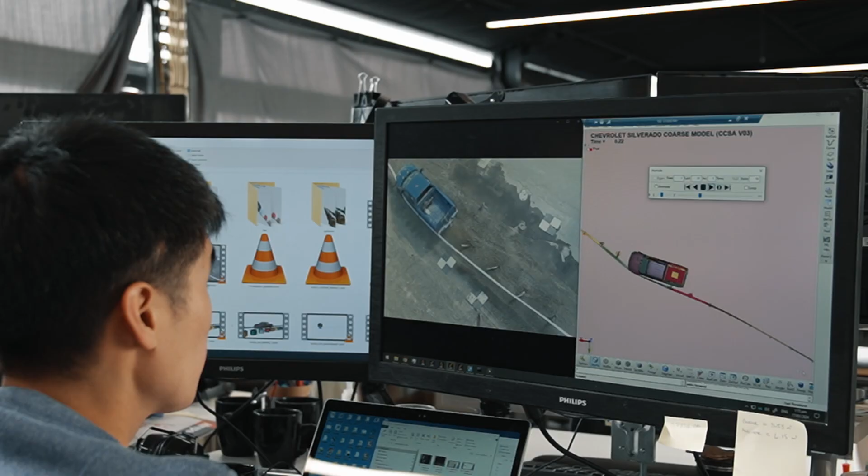At Holmes Solutions, we love solving complex design challenges. We specialise in engineering, testing and product development. Many of our projects are in high-risk industries with substantial life safety elements. Our work ranges from new transport solutions and efficient timber connections to adventure rides and dynamic impact testing. We do everything from ideation and testing to final product compliance. Our clients come to us because they know we want them to succeed. We help them make a meaningful difference in their businesses, their industries, and in people's lives.

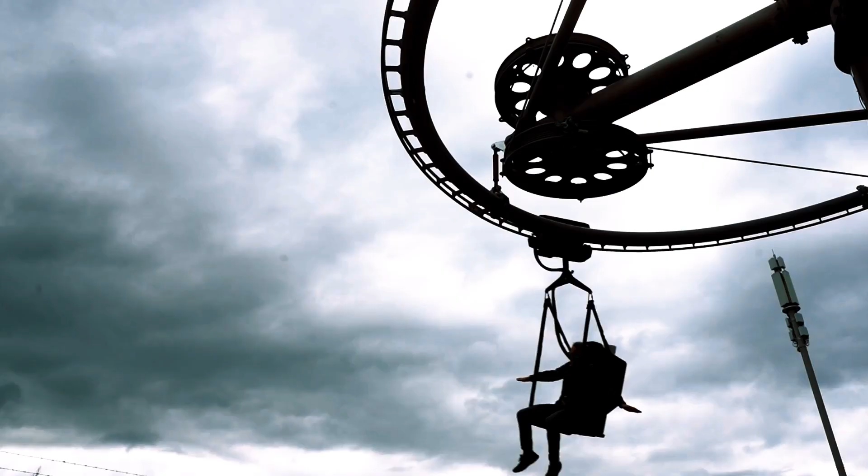We do a lot of exciting work in the adventure industry. One of the cool products we've developed is called Switchback. It's a new zipline technology that can go around corners and even uphill, opening new opportunities for epic adventures around the world. Our Switchback design work ranges from complex mechanisms in the trolley all the way up to site and course layouts. Collaboration is important at all stages of design.

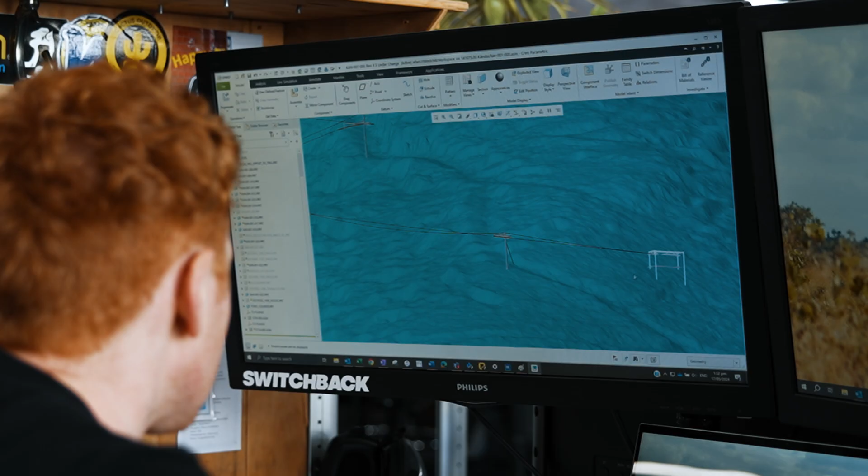We use 3D CAD modelling and PDM tools to learn and iterate our design ideas quickly. It's always exciting to show a client how their ride is going to look in real life, while exploring configuration options and final appearances on the fly.

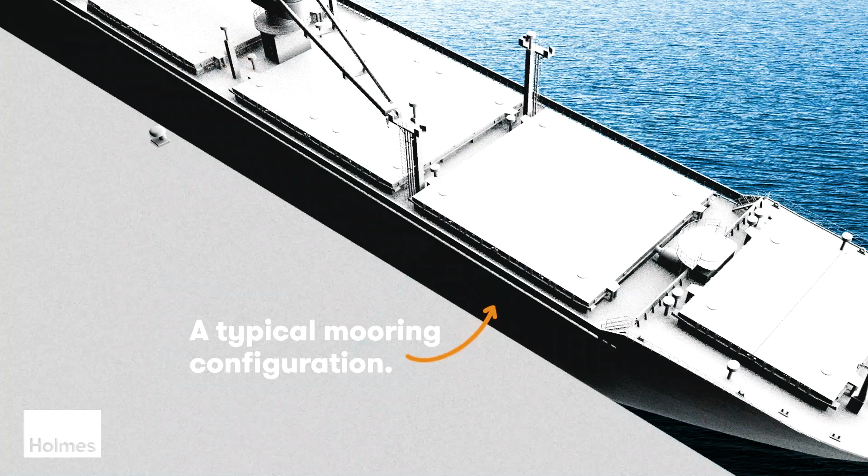One of the interesting projects we've worked on recently is testing to understand snapback events. A snapback is when a marine mooring line breaks under high tension. The parted lines can break the speed of sound in less than half a second. A snapback arresting structure is subjected to significant kinetic energy over a small area and over a short period of time, almost like a bullet.

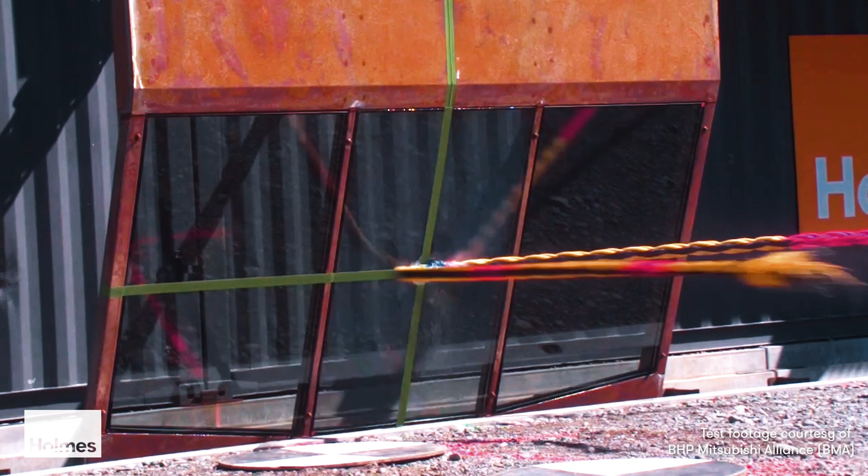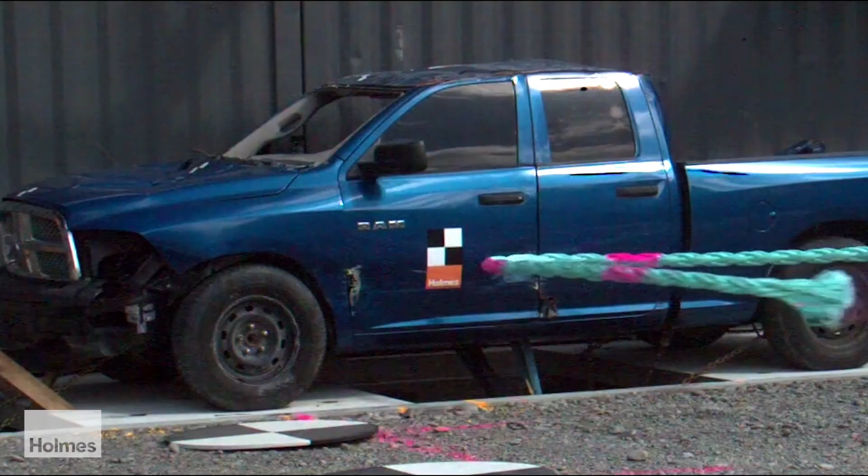Gauging impact severity with conventional methods risks understating the impact, which has led to people using safety structures which may not be effective. A major mining company asked us to come up with a validated safety solution for their berths. This had never been done before. We used a world-first full-scale test setup to prove their design.

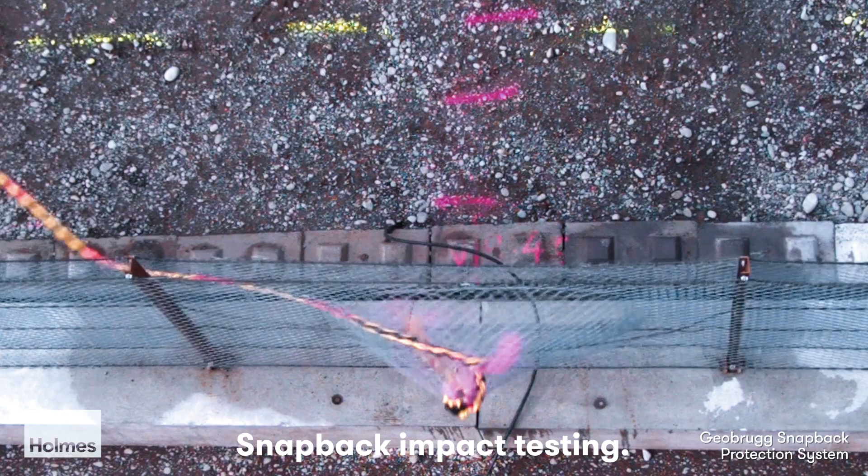Simulation was the key to this process, to understand both the line behaviour and the response of the arresting structure. Using the simulation model, we were able to break down what we observed in testing so we could develop consistency in the test platform and optimise the performance of the structure.

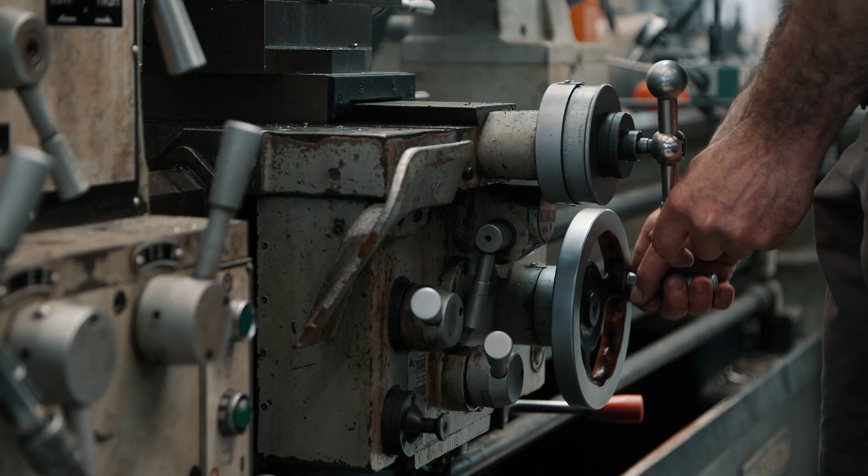Often, more complex problems require us to take our 3D models further into an analysis cycle with tools like ANSYS or Creo Simulate. The analysis tools complement our in-lab testing, allowing us to build powerful, validated models to try new ideas and vary parameters. The advantage of this is our ability to have the same team members working between the lab and the computer, using evidence-based design methods to solve problems in real time. Tools that can keep up with us and improve that process are invaluable.

Creo has been our primary 3D CAD modelling package for over 15 years. It helps us communicate complex ideas and collaborate on parts and assemblies within the team, especially when paired with Windchill product data management. These tools are vital to effectively design and problem solve for our clients.

We have a wide range of projects, so the tools we use have to be flexible and adaptable. ANSYS allows us to understand complex loading and stress responses in our designs, especially when a prototype or system is too large to build and test. This helps us narrow down our solutions early and focus on delivering the end result with confidence.

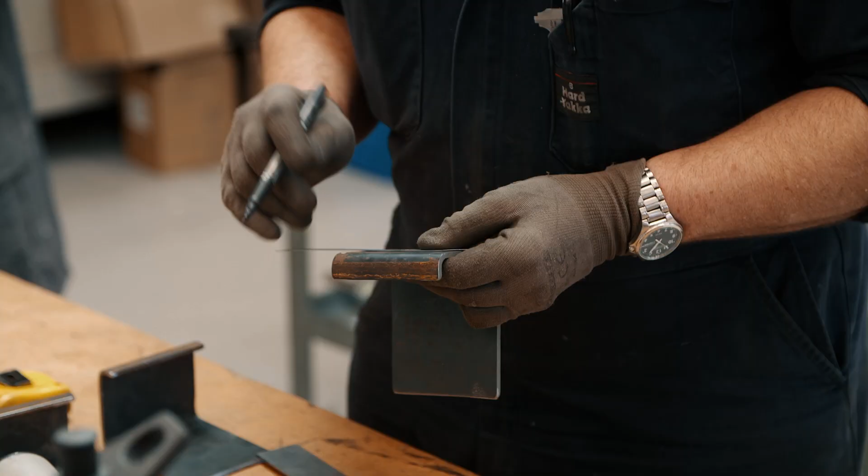For example, we recently significantly improved the performance of our client's product using topology optimization in ANSYS. This feature allowed us to determine where material should be positioned to achieve the highest strength to weight ratio. As a result, we achieved a 50% increase in the strength of the component, while keeping the mass the same as the original part.

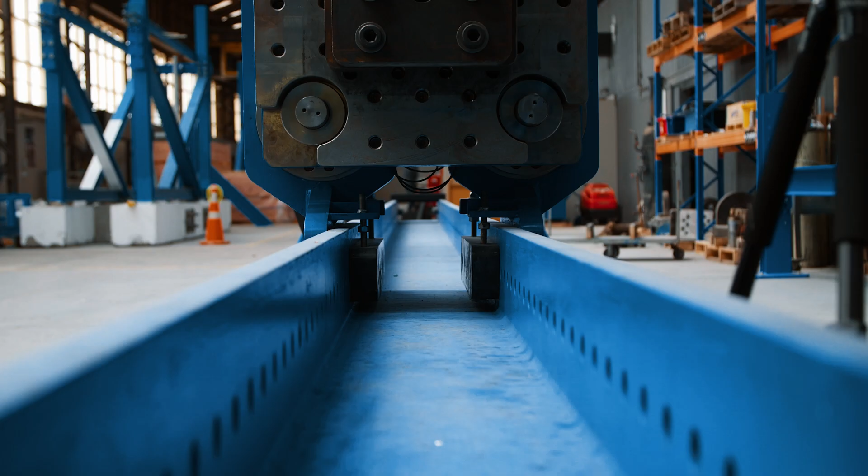Another area we've done a lot of work in is validating the performance of seismic energy absorbing components. This is especially important in New Zealand, where we are very prone to earthquakes. These components must achieve a required displacement without failure, but the limit, the displacement at failure, is not always known.

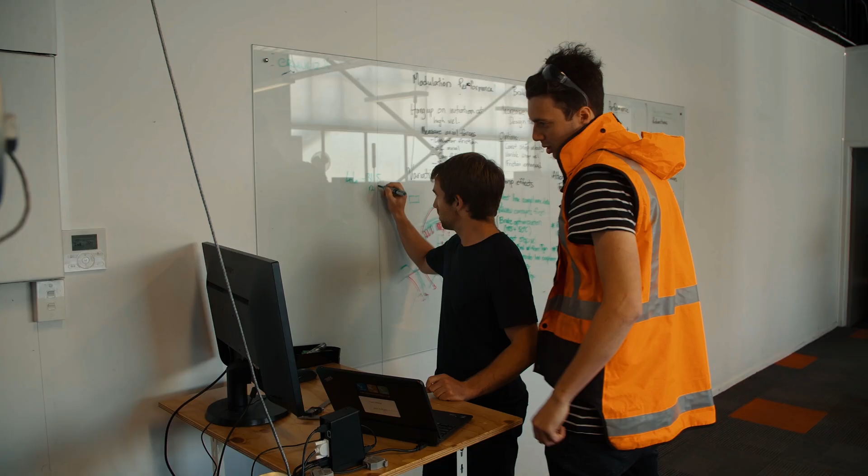So, we use a non-linear plastic analysis in ANSYS to determine the simulated performance of the component. We can then develop a more accurate and efficient test program to take into the lab before working on the actual product. Many life safety products are designed to absorb massive energies or extremely large dynamic loads through controlled plastic failure or deformation.

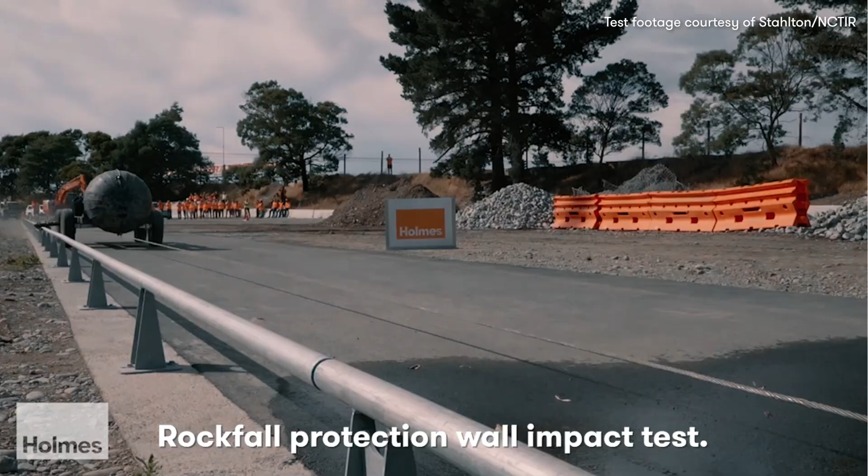These events can occur in seconds or milliseconds. From an engineering perspective, they are extremely complex non-linear loading events. Examples include cars crashing into roadside safety barriers at 100 km an hour, rockfall protection systems being impacted with rocks travelling at 80 km an hour, or seismic restraints that absorb the loads generated by a 1 in 500 year earthquake event.

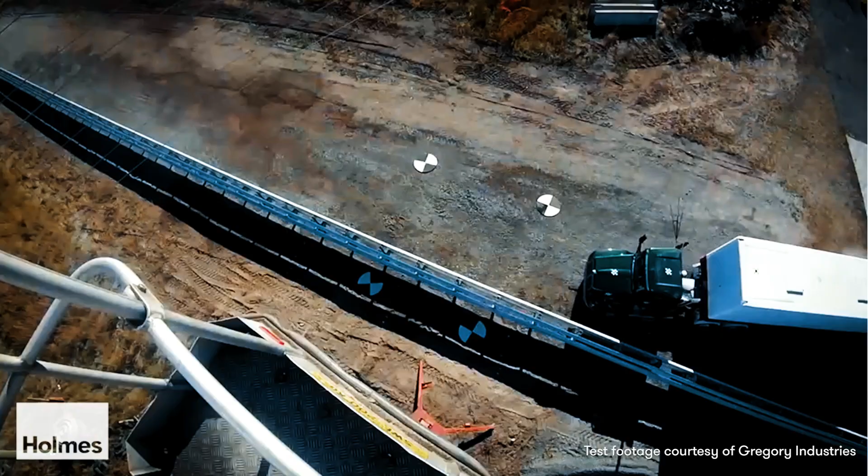In these cases, we use simulation with LS-DYNA to support full-scale testing. Simulations help us evaluate performance of different ideas before real-life testing. Once we've tested, we calibrate the model and use simulations to help predict performance of design variations or other situations.

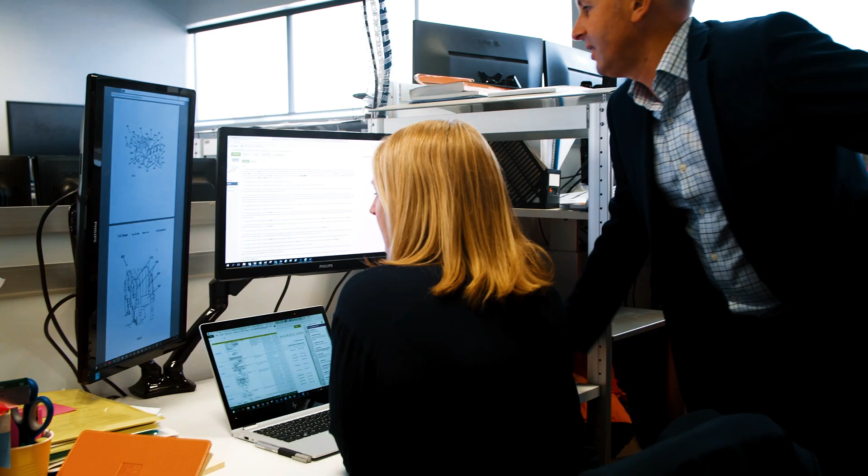Leap gives us access to product experts, for example in Creo or ANSYS, putting troubleshooting within easy reach. LEAP collaborate with us to develop new techniques for solving problems that push the limits of the tools, helping us lead the way in innovation.